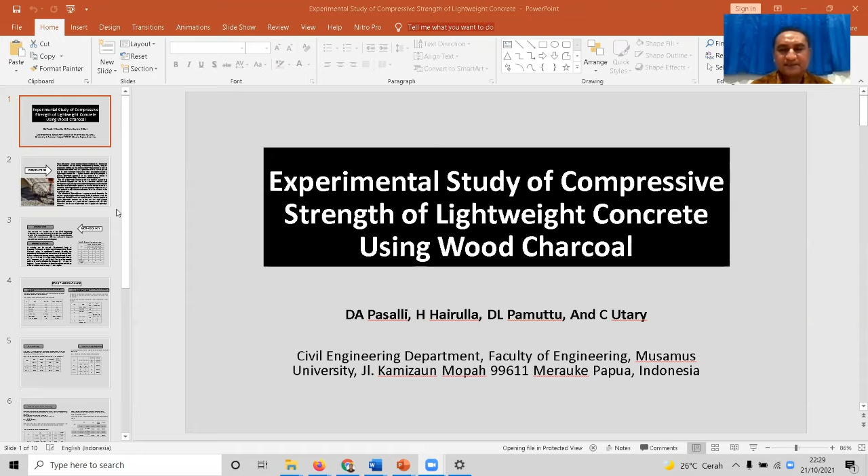Introduction. The use of lightweight concrete materials in Indonesia, especially in the Merauke Regency, can be an alternative amid the rapid development of the housing sector.

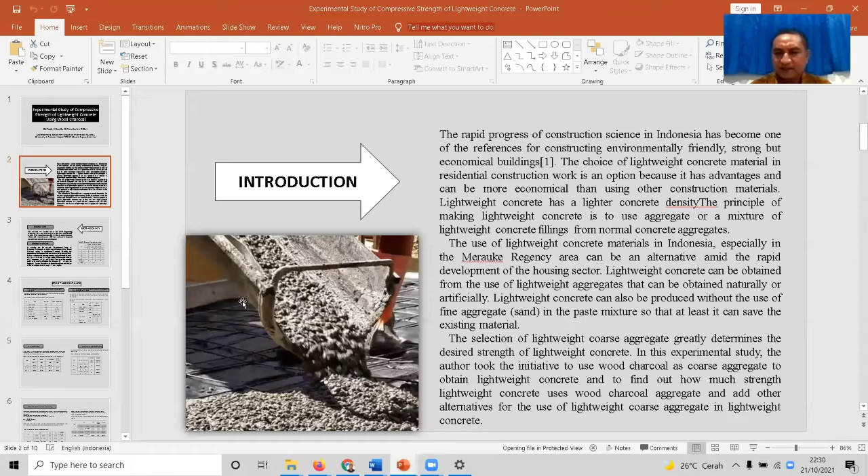Lightweight concrete can be obtained from the use of lightweight aggregates that can be obtained naturally or artificially. Lightweight concrete can also be produced without the use of the fine aggregate in the mixture, so that at least it can save the existing materials. Next.

Research sites. The research was carried out at the Civil Engineering Laboratory, Musamus University in Merauke. The wood charcoal used is taken around the Semangga district, Merauke Regency, which sells wood charcoal, while the sand used is imported material from outside Merauke Regency.

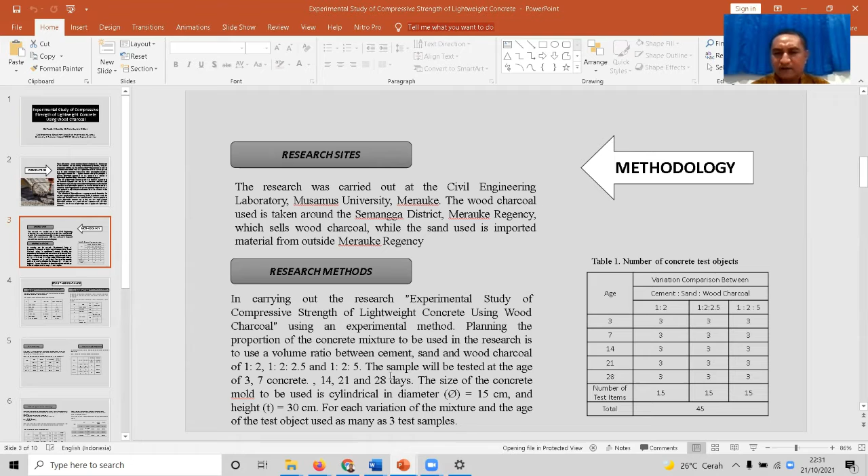Research methods. Carrying out the research experiment study of compressive strength of lightweight concrete using wood charcoal uses the experimental method. The proportion of the concrete mix to be used in the research can be seen in table 1. Next.

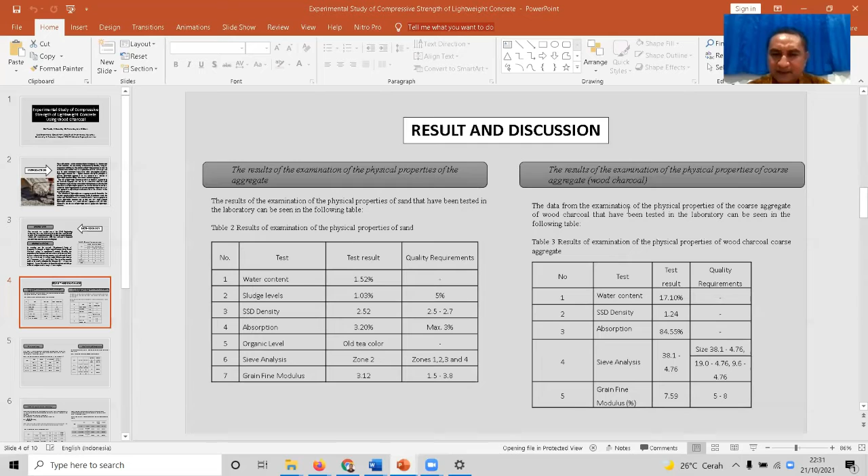Result and discussion. The results of the examination of the physical properties of the material sand can be seen in table 2. The results from the examination of the physical properties in the laboratory can be seen in table 3. Next.

Concrete mix design. For the concrete mix design, the result of the comparison of the volume of material requirement per meter cubic can be seen in table 4. And the average 28 days old concrete density can be seen in table 5. Next.

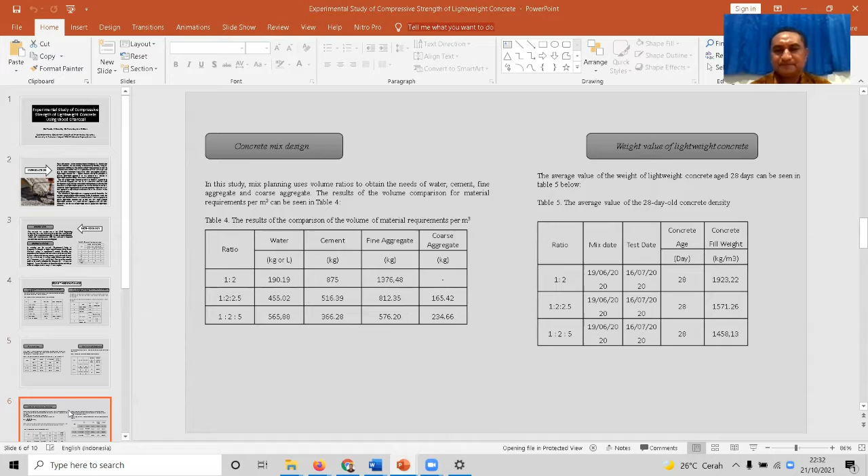Yield value of concrete compression strength can be seen in table 6. Concrete compressive strength test results can be seen in table 6. And the result of lightweight concrete compressive strength and density can be seen in table 7. Next.

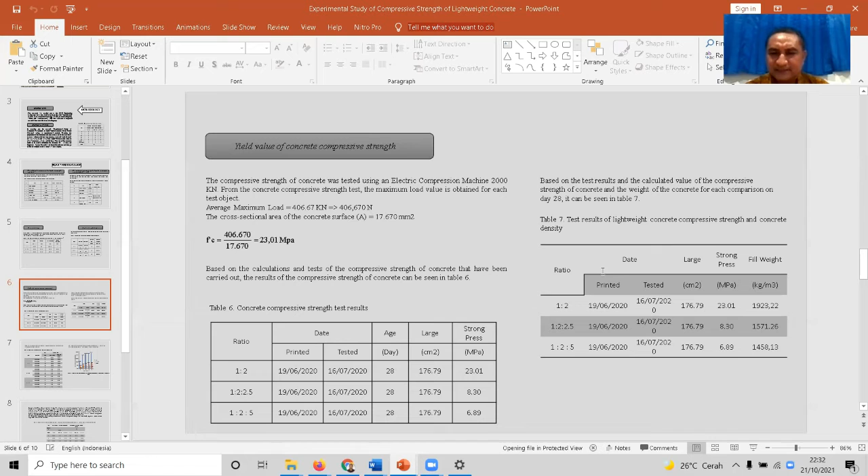Conversion of the compressive strength of lightweight concrete for each day of the test can be seen in table 8. Table 8 is the conversion of the concrete compressive strength values.

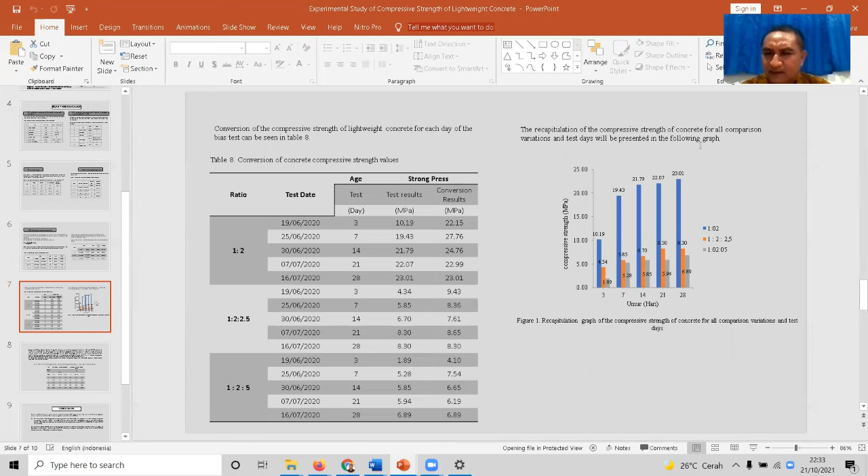The recapitulation of the compressive strength of the concrete for all comparison variations and test days will be presented in the following graph in figure 1. Next.

From the recapitulation of the compressive strength of concrete above, the compressive strength of concrete on the test day decreased by 57.41%. The recapitulation of the percentage decreases in the compressive strength of concrete for all variations and test days can be seen in table 9. Next.

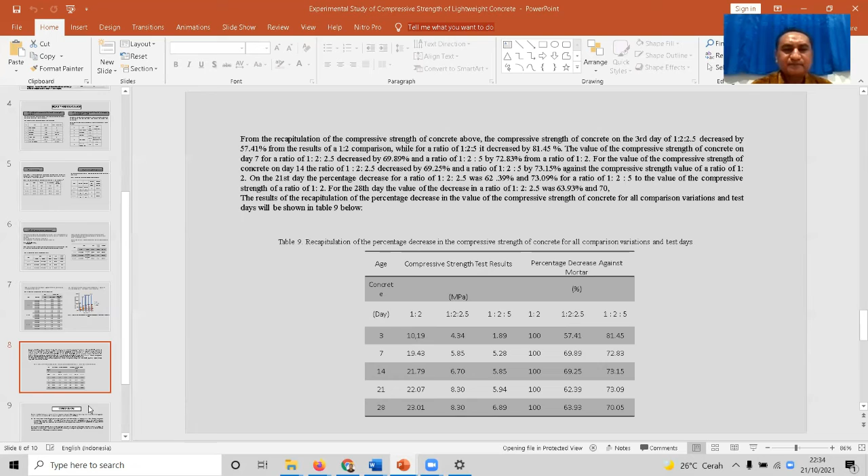The 28-day compressive strength obtained from a ratio of 1:2 is 23.01 MPa, while the compressive strength of the lightweight concrete using wood coarse aggregate with a ratio of 1:2:2.5 is 8.30 MPa, or with a ratio of 1:2:5 is 6.89 MPa.

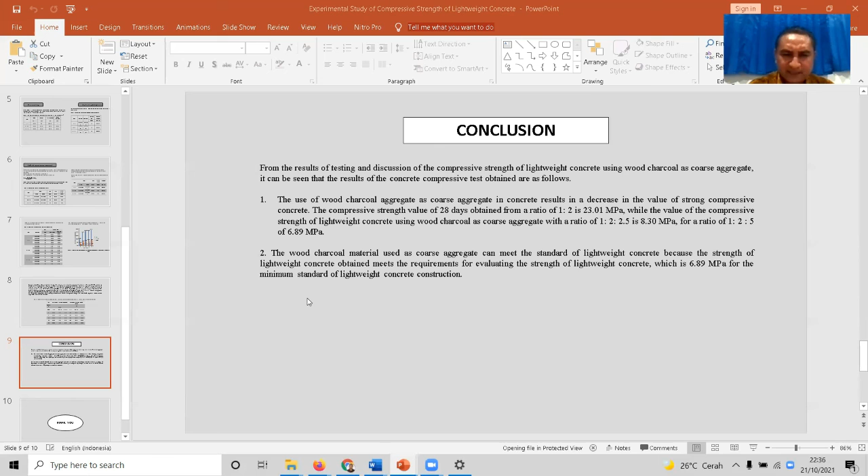The wood charcoal material used as coarse aggregate can meet the standard of lightweight concrete, because the strength of lightweight concrete obtained meets the requirement for lightweight concrete strength, which is 6.89 MPa for the minimum standard of lightweight concrete construction.